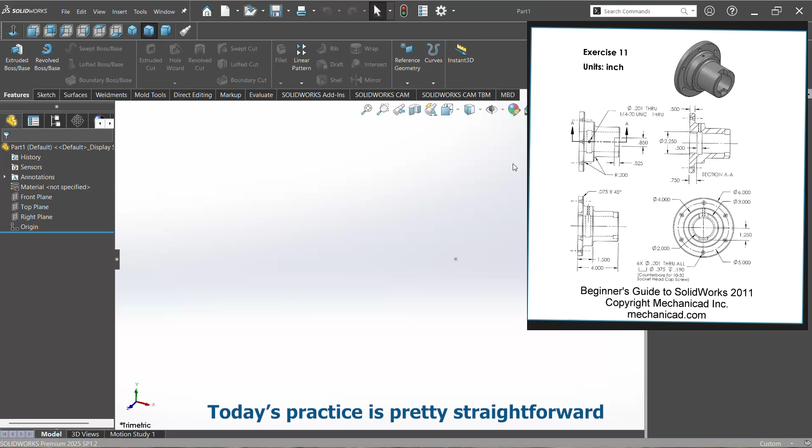Okay, what do you have here? Says hello, straightforward. Okay, let's do it. So,

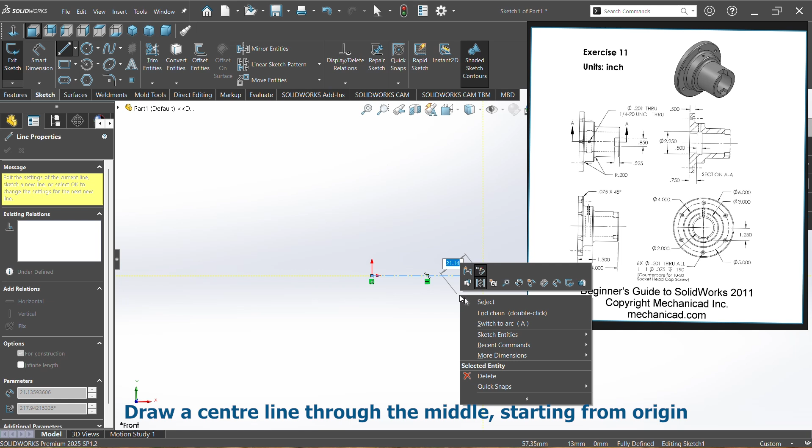Starting the sketch with front, and pick our center line, make a straight line, a straight horizontal line, back to the line tool again.

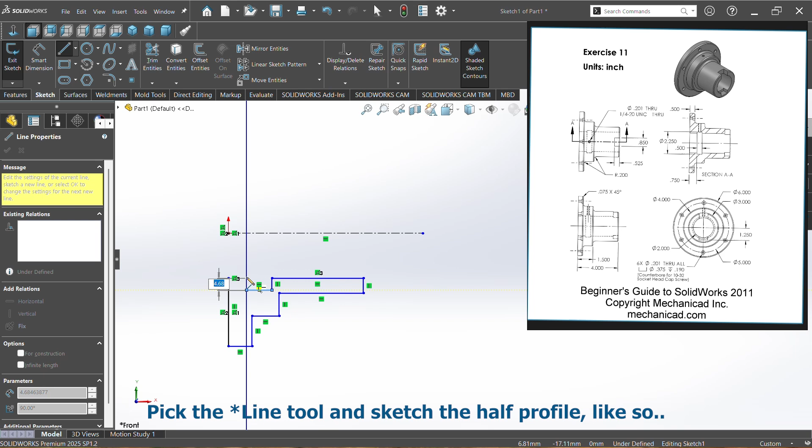Okay, so we're going to draw our profile. Using the revolve feature here. Alright, done. Next, we take the dimensions.

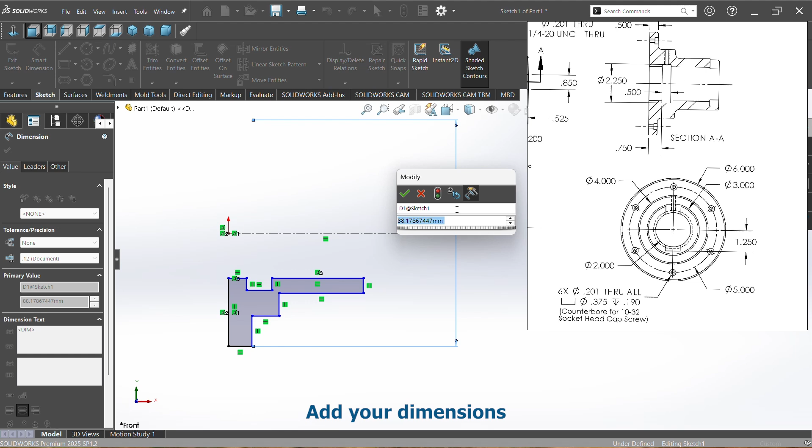This to this is 6, that's 6 inch. In the middle to here, that should be 4. So this is the whole diameter, not just the radius. Okay, here to here should be what, 3. Yeah, it's 3.

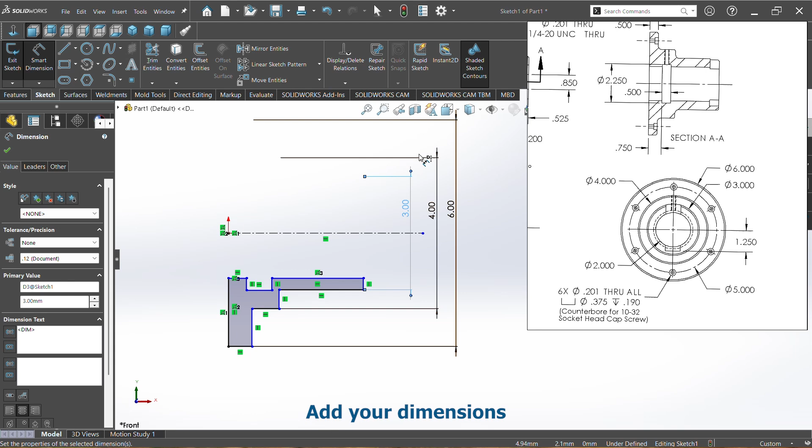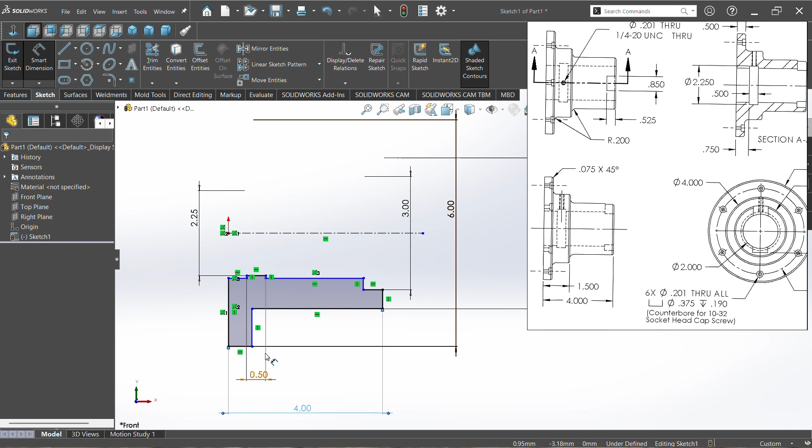Okay, for more dimension, here to here is 2.250 inch. Here is 0.5. Here we have 4. No, supposed to be 1.5.

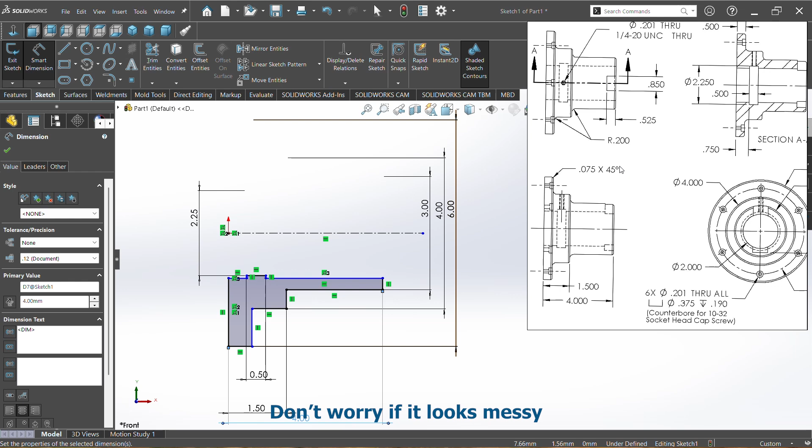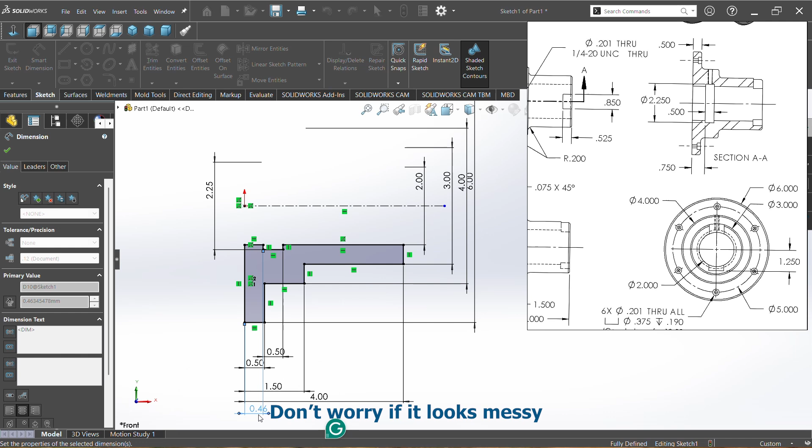Yeah, to here is 0.75. I think that should be it. Yeah, that's it. Let's go ahead and revolve the sketch.

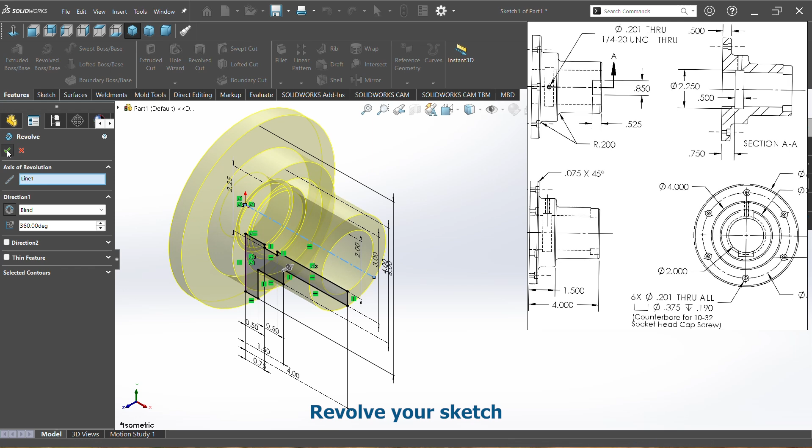Wow, just like that. Almost done. The revolve feature is a really powerful feature. If you know where to apply it, you can solve problems just like that. Even if you're modeling a very complex part or assembly, the revolve feature comes in handy.

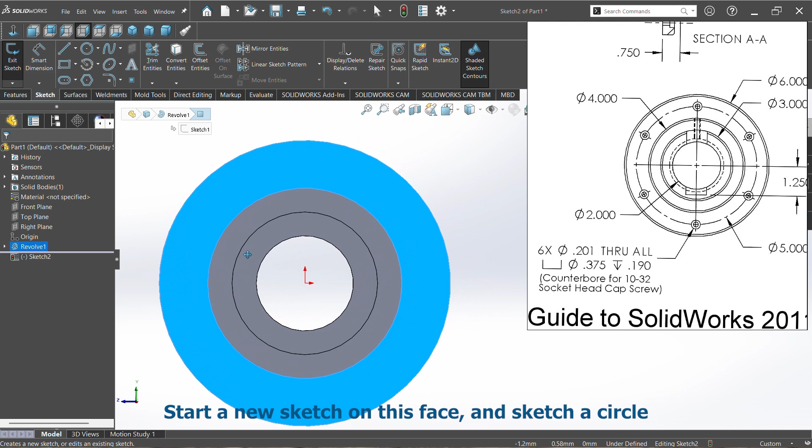Here we're going to sketch out holes. Continue the big circle first.

It's a dimension. That's 5. Make it for construction. And draw a few more little circles around it. Okay, just the 2. Then make a circular pattern.

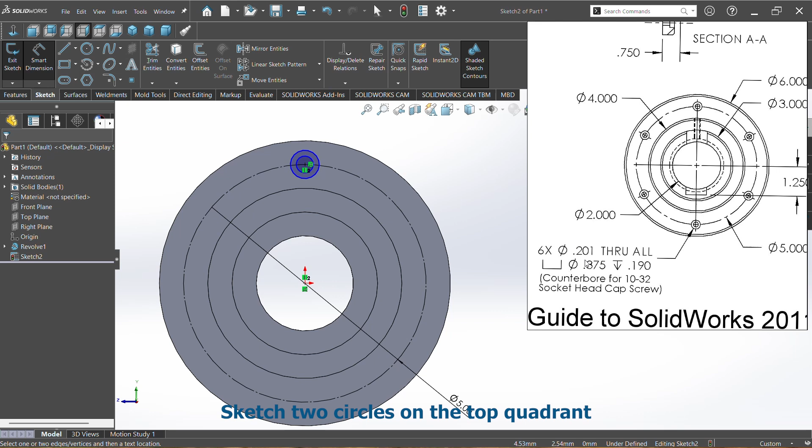Okay, let's dimension it first. This is 0.375. Then the other one is 0.201. Zoom in, zoom in, zoom in, zoom in. Okay, nice.

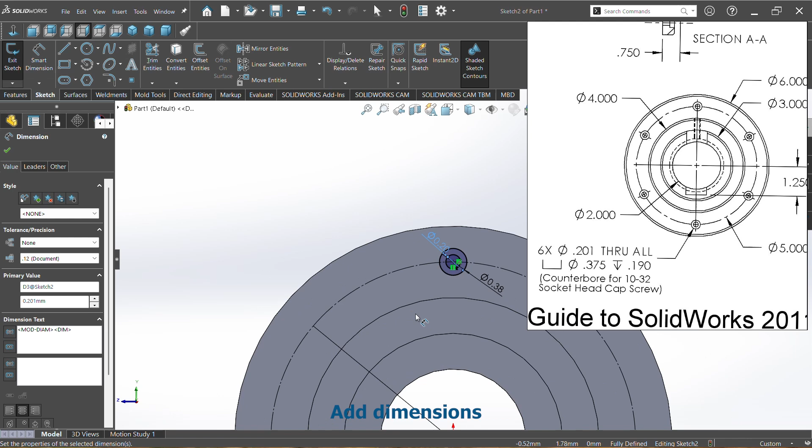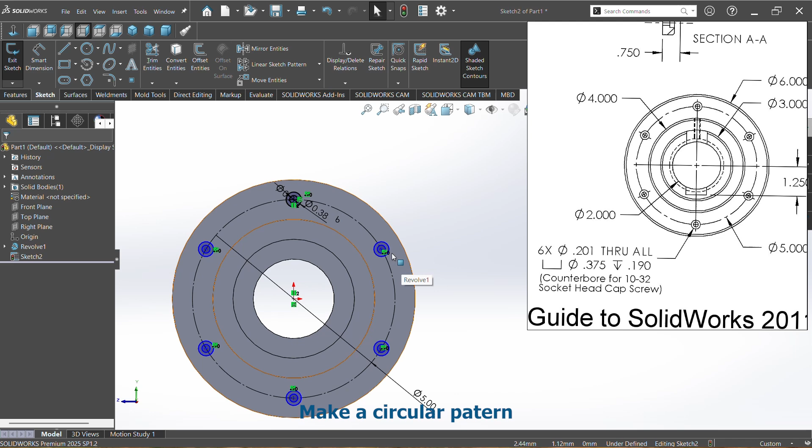Yeah, so let's make those holes extruded cut. Not all, just the inner one should cut through all, and select the inner ones, inner circles.

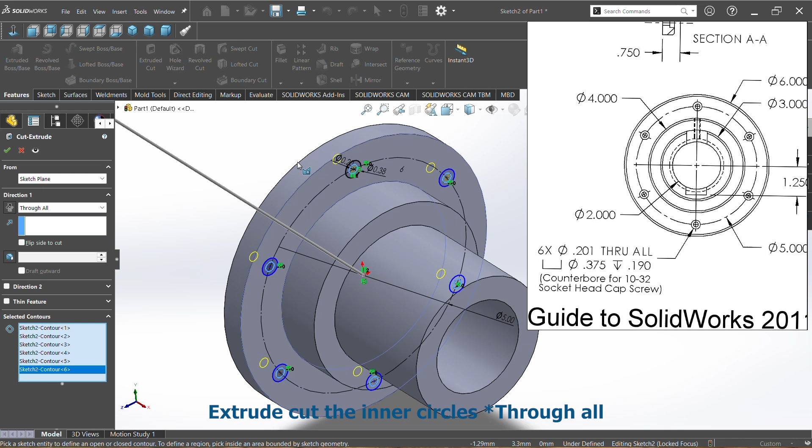Go back to your sketch again, extruded cut, counterbore, goes down 0.190. Yeah, there we have it.

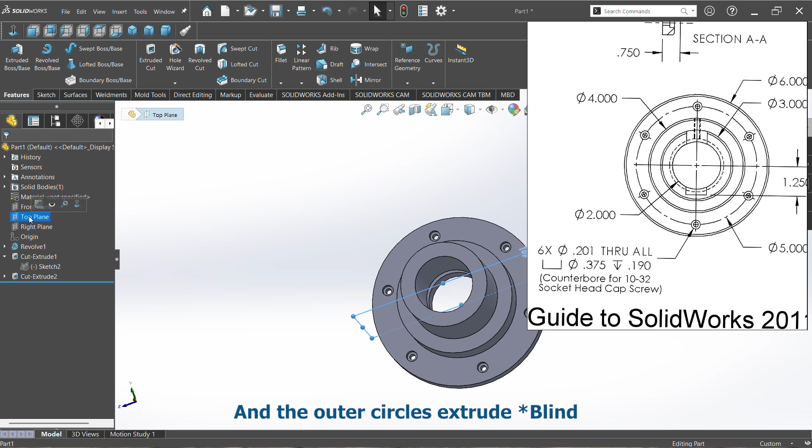What's next? What's next? What's next? Yeah, that cut on the top part.

Let's make a box or a rectangle. Then this, the dimension. Corner rectangle. Let's make a relation. The origin, the midpoint of the line, horizontal.

What's your dimensions? That's 0.850. The other side is 0.525.

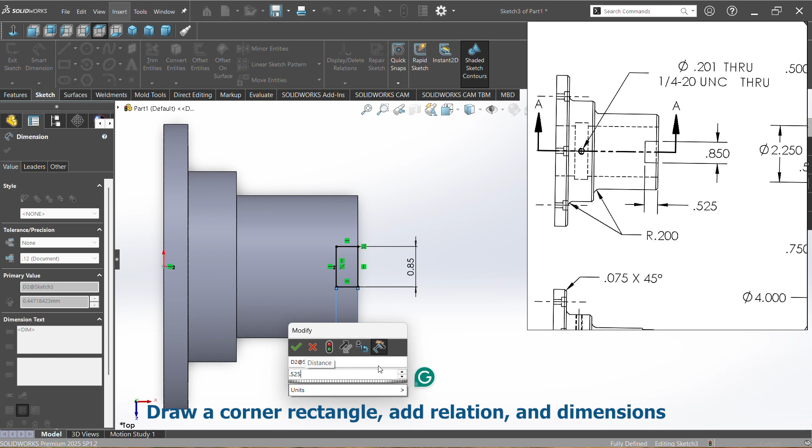Extruded cut. You do it both ways. Both ways. One side passes through all, then the other side doesn't pass through all. Passes by 1.250 millimeter. Let's put that 1.250 in second direction through all. Cool.

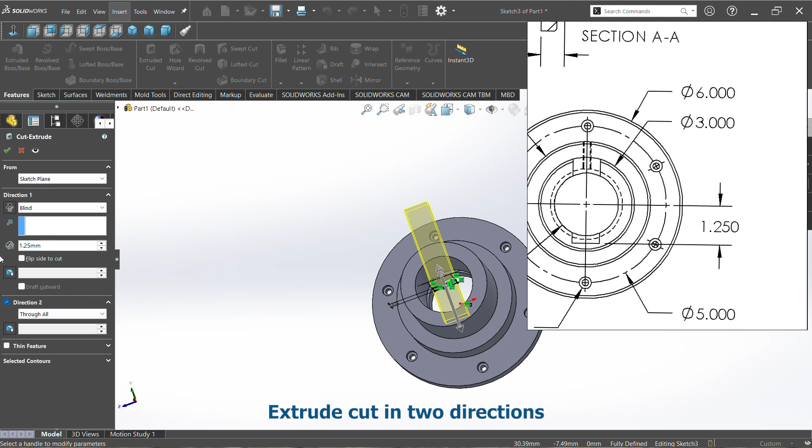Yeah, almost done. Let's add in the fillet and the chamfer. Fillet first. What's our fillet radius? 0.2.

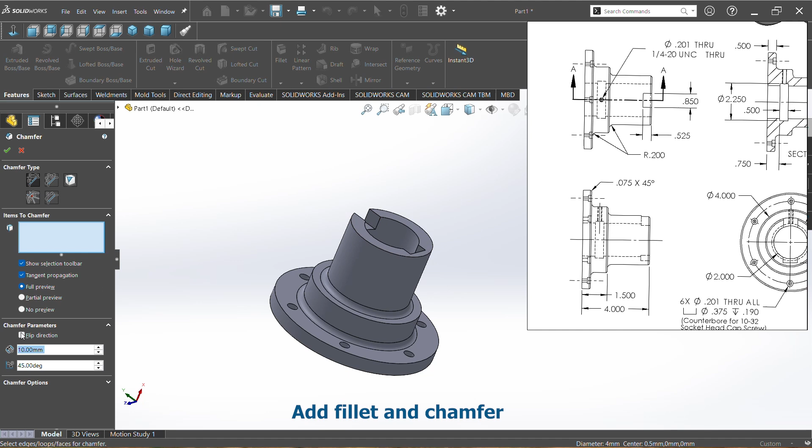And chamfer. Chamfer radius is 0.075. Okay, I think that should be it.